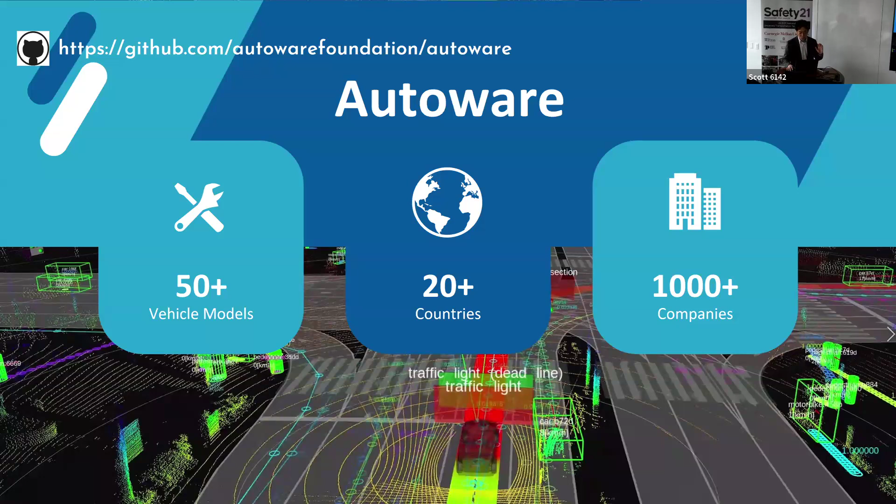Now let me explain what you can do with this open source software without any modification, any single line of code modification. This is some data that we recorded from our experiment in Tokyo. So AutoWare has a basic set of functions integrated, like localization, perception, planning, control. So it can successfully detect objects and localize the position of the vehicle and predict what will happen, then generate a trajectory, then control the vehicle like steering, accelerate and brake throttles to follow that trajectory. These are basic features.

Coming from years ago, so open source is not cutting edge. Open source is the way we provide basic features, well-known algorithms, which are not cutting edge, but are ready for deployment. So that's what I believe open source has value.

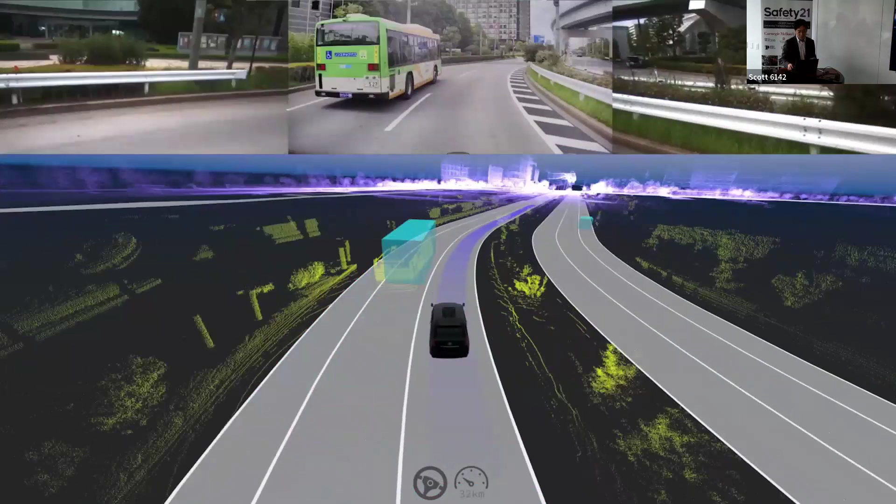Now, there are many applications that we can build using this open source software. I can introduce a few examples that we do.

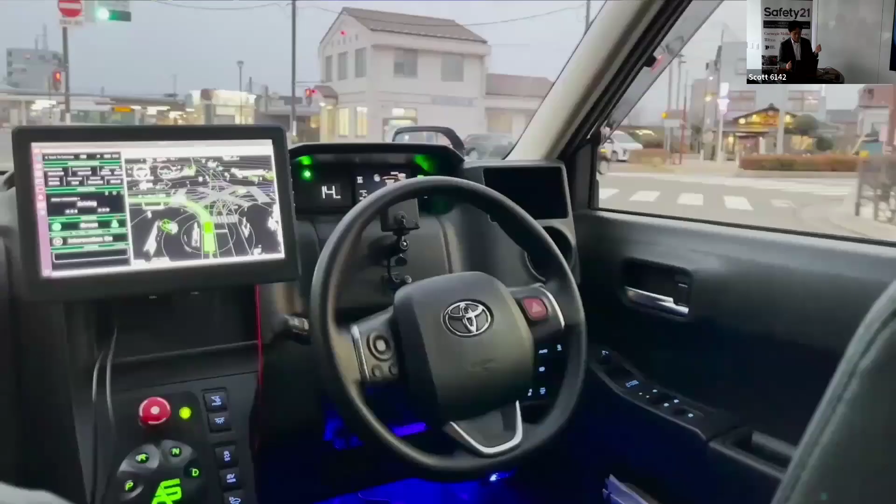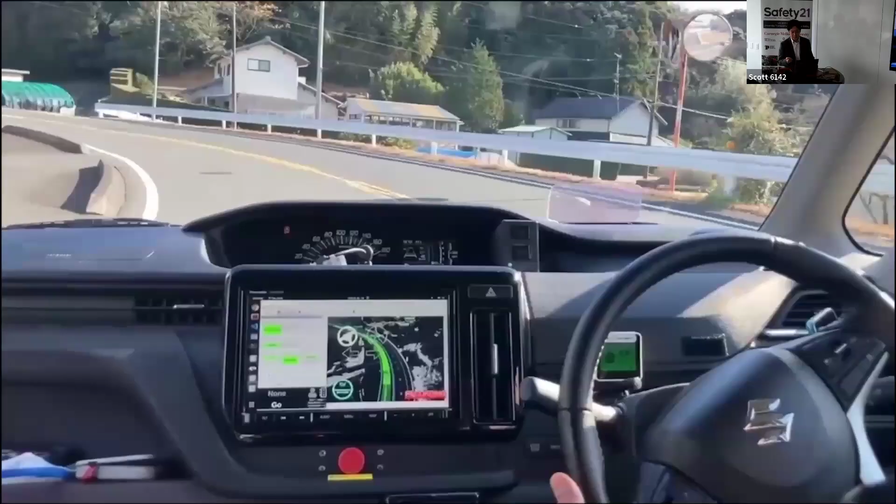So robotaxi may be the most well-recognized symbol of autonomous driving, and we deployed this even 4 years ago, with no human drivers inside the vehicle, and we qualified to operate this on the public road. But we didn't want to make a mass production of this vehicle because that's not the goal of our business. The goal of our business is to make car makers or other partners be able to do what we have done before. So open source is the way that allows you to replicate and modify what existing applications can do.

So this is Suzuki, and this is Toyota. We actually provided the Tokyo Olympics with a micro shuttle bus with some autonomous mobility.

Now, I also want to make this software vehicle agnostic, not only taxi, but also the buses. We also just started public transportation services in Japan, again with no human drivers in the driver's seat. We qualified through the Ministry of Transportation and police agency, and a lot of stakeholders now agree on the setup of the vehicle so that it can go for the real business.

So certification or certifying vehicles is kind of a challenge even today. I only see a few companies, even in the US, like Waymo, driving real driverless services. So it's not only about technology, but also about how we can communicate with the stakeholders.

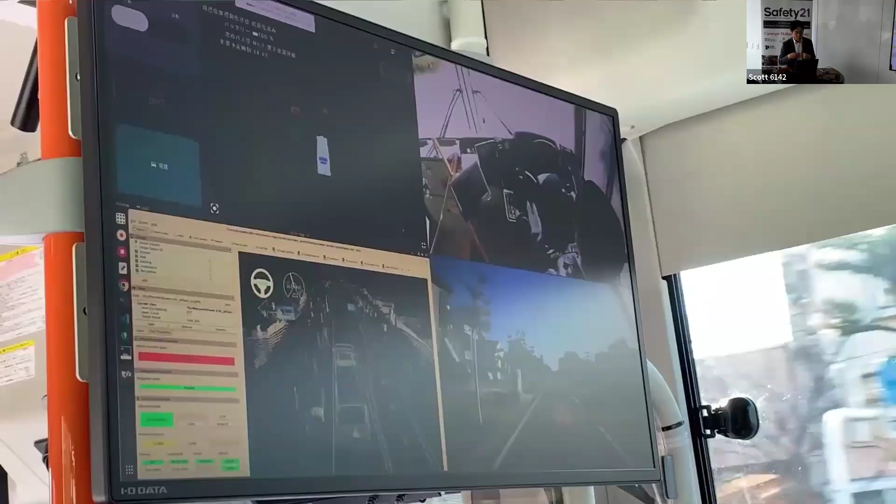For this operation, we are not yet qualified to operate driverless services, but it will happen within a year.

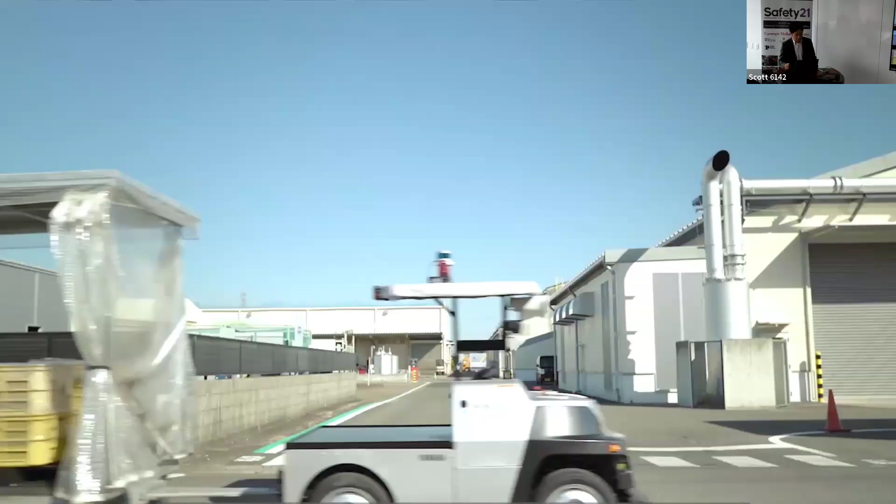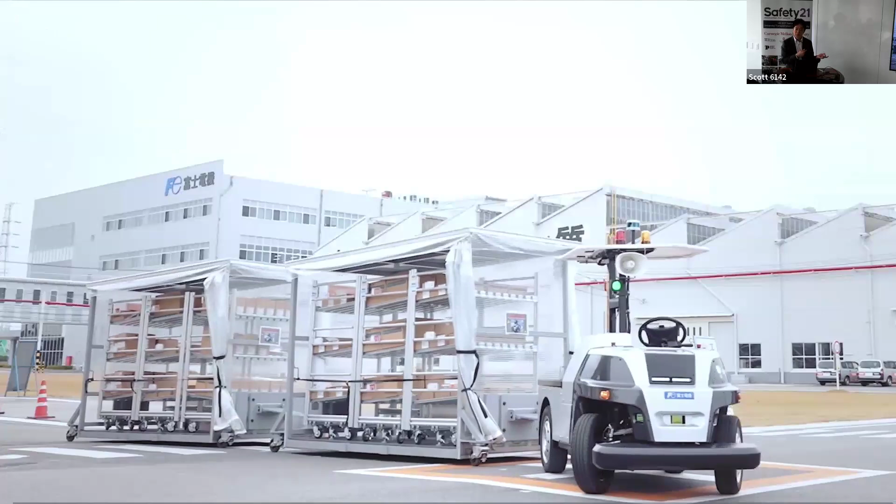And autonomous driving actually means a lot, not only for public road services, but also for geofence area factory automation. We have a joint venture with Yamaha Motors, also a shareholder of our company. This is commercial, 24 hours, 365 days operations already, and more than 100 factories are using our vehicles.

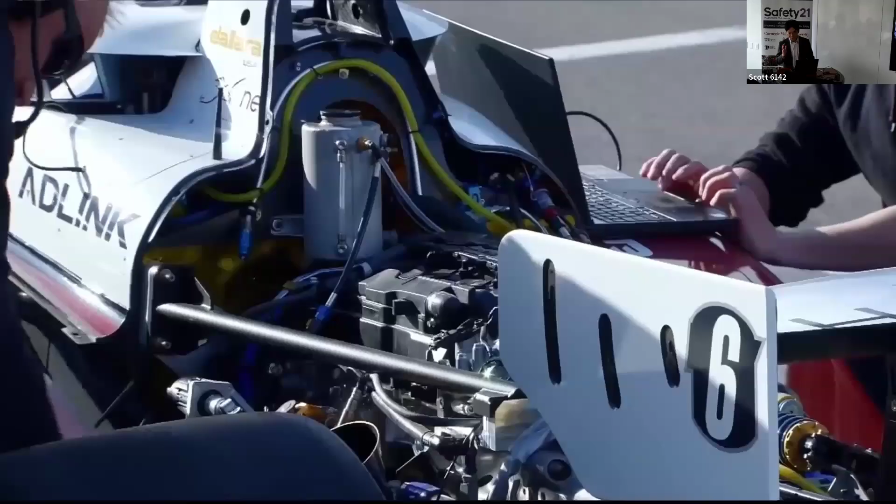So there are only limited case studies, use cases. Open source is infinite—everybody can basically implement their own application.

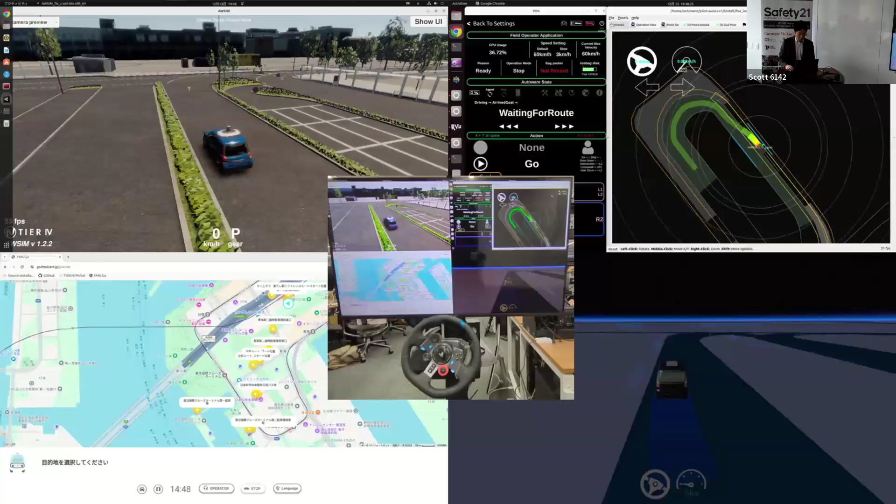So to support these users, we'd like to develop an environment which is easy to use. Field testing is sometimes difficult because you always put yourself at risk of accident. So I'm interested in providing the world simulator, which is an exact imitation of the real world.

Left top is a digital twin, an imitation of the real world. Left bottom is just a global map. Right top is the result of the software—if you know robotics, we use ROS, which has the viewer and some system.

So this system does not recognize that this is fake. The system believes that this is a real world because the texture and digital twin look really the same as what is happening in the real world.

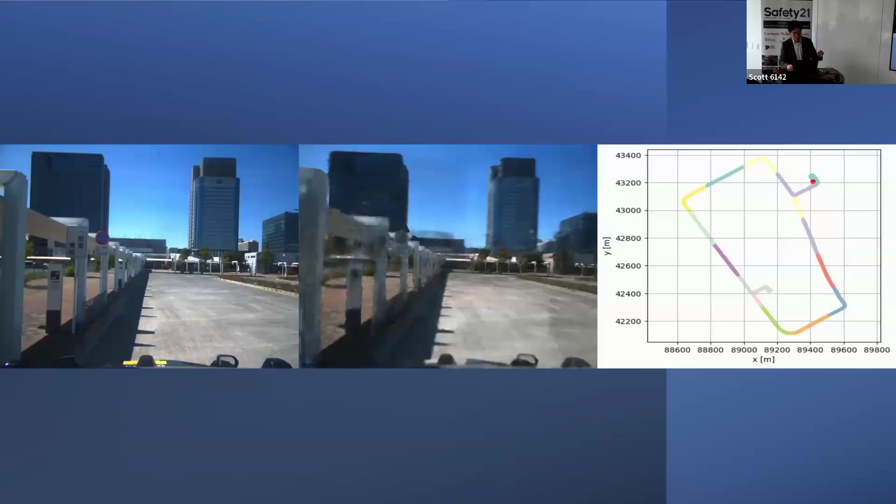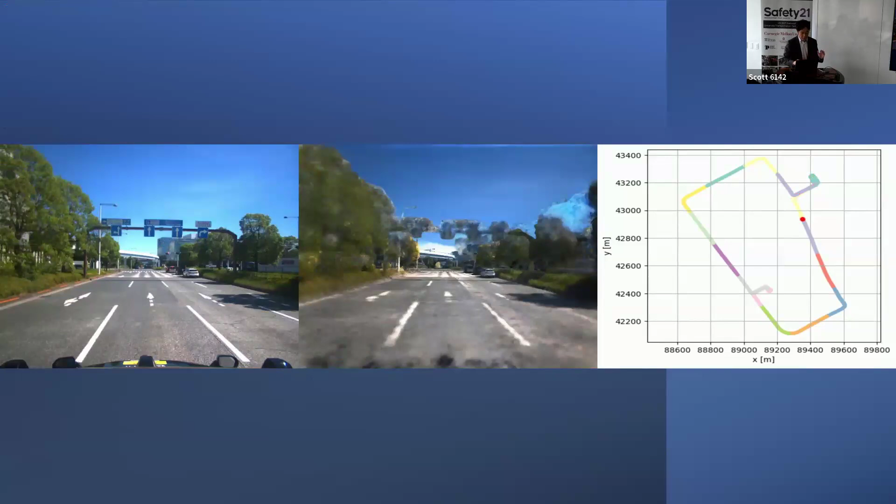Now we want to also improve this simulator using generative AI. Building a digital twin today is a little bit expensive, taking some complex processes. So instead, we'd like to just use the videos from vehicles and use generative AI to generate the real world that can actually predict what will happen.

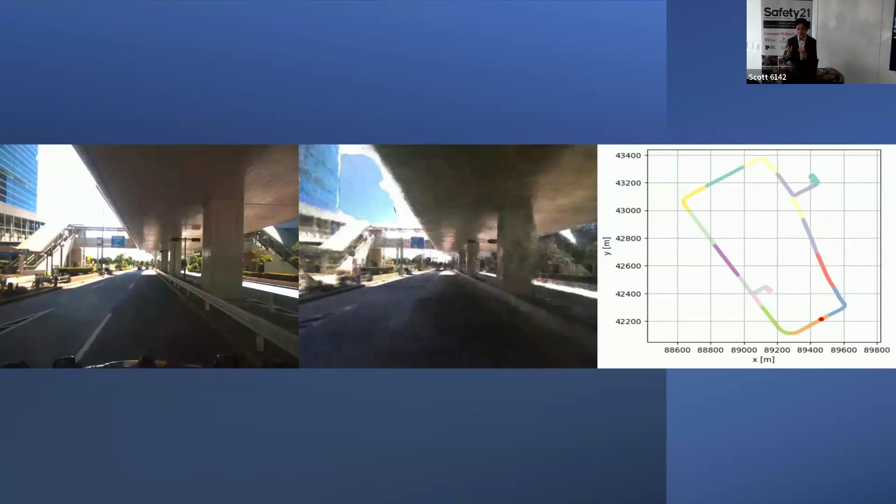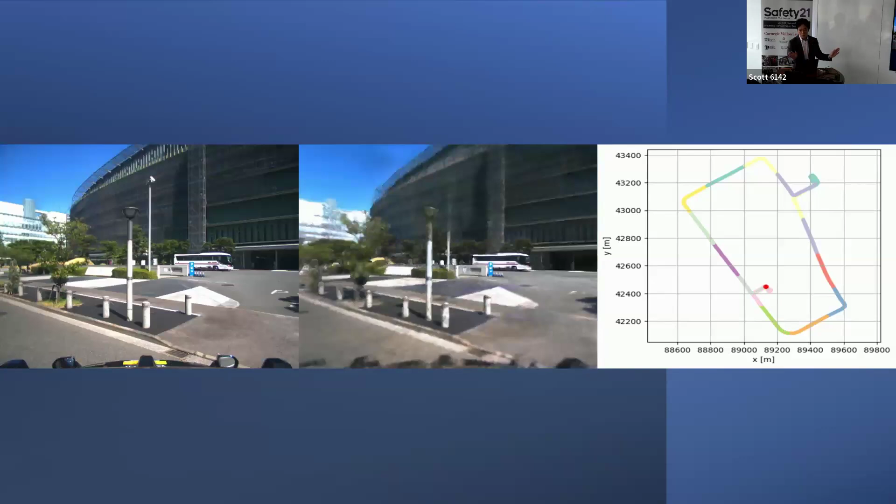So the left-hand side is the real data, and the right-hand side is the prediction from the generative AI. You can see that the prediction and the real data almost match, meaning that the generative AI can successfully predict what will happen. If we can do this, then we can leverage this system for simulation to test not in the real world, but also in...

Quick question, what is the time constant for the prediction? Is it a few seconds or?

That's a good question, because I didn't know, but yes, that's a challenge. Yes, this is offline computation—we need to really make it real time. That's why I think your institute has amazing work.

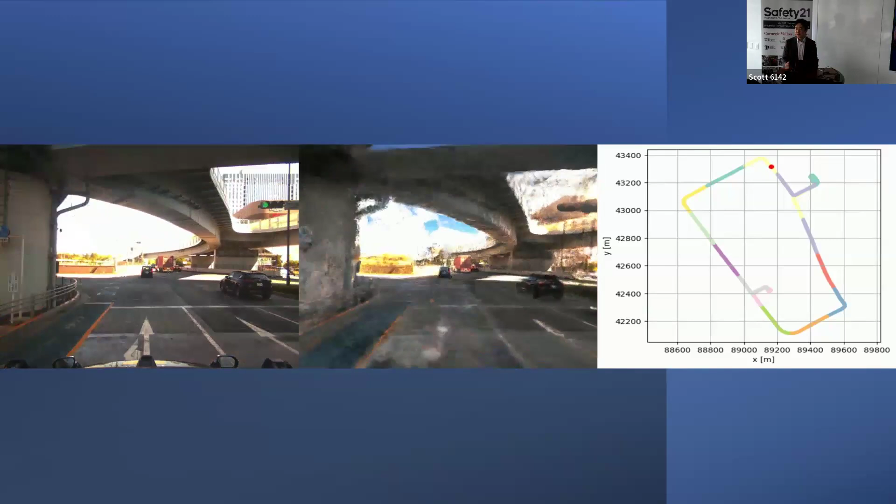So prediction means, can you predict this frame 3 seconds before or 10 seconds before? It depends on the configuration, but I don't think it can go over 1 or 2 minutes—1 minute is a lot, because we need a bunch of data, but it depends on the size of the network. Right now, like Sora from OpenAI, it's also 2 to 3 minutes, but I think going over 1 minute, some context doesn't make sense. So 1 minute, I think, is the upper bound right now if we have a big network, but it's a trade-off with the computation overhead.

So for this particular setup, I don't know what the size of the prediction is. Yes, we need more data. It's a chicken and egg problem. Once we have this world simulator, you can get the data from the simulator.

But in order to build this world simulator, you need the real data first. So we are collecting data from all over the world. The idea is simple: distribute the cameras, LiDARs, and our partners around countries, and they give us data. We really need to address each region's regulation because data is IP, and sometimes has regulations to go across countries. We can somehow address it in the future.

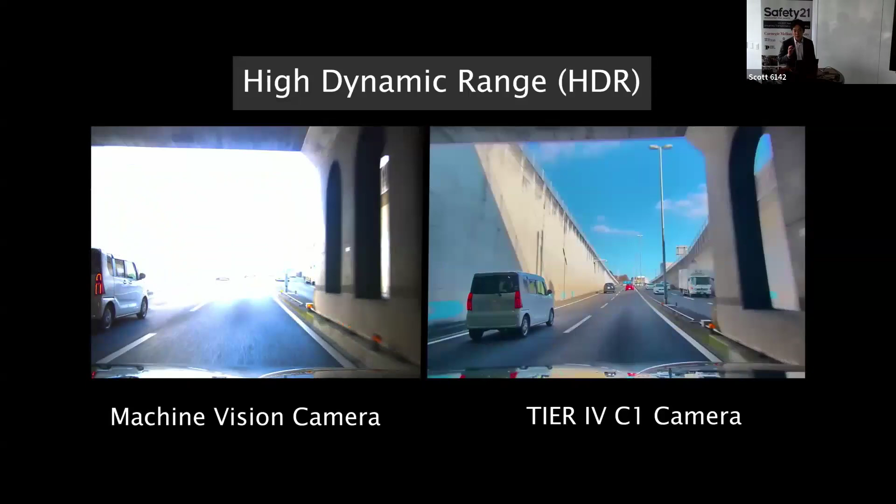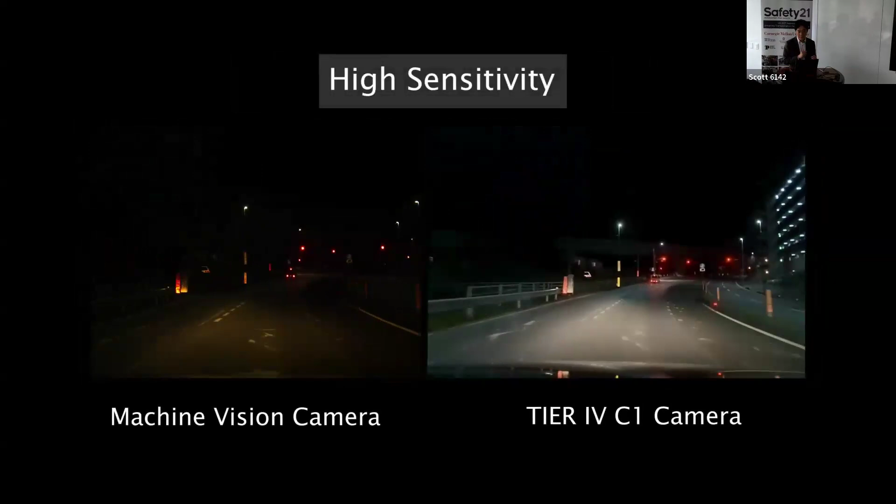Also, there are some details. In order to do this, we couldn't find any optimized cameras from the market, so we developed a new camera. Most cameras are not optimized for autonomous driving, so we developed a new one with our own design because we understand the software requirement. We can highly tune up the camera parameters module in order to work for AutoWare. So now most AutoWare users are using this camera because it is functional in many conditions.

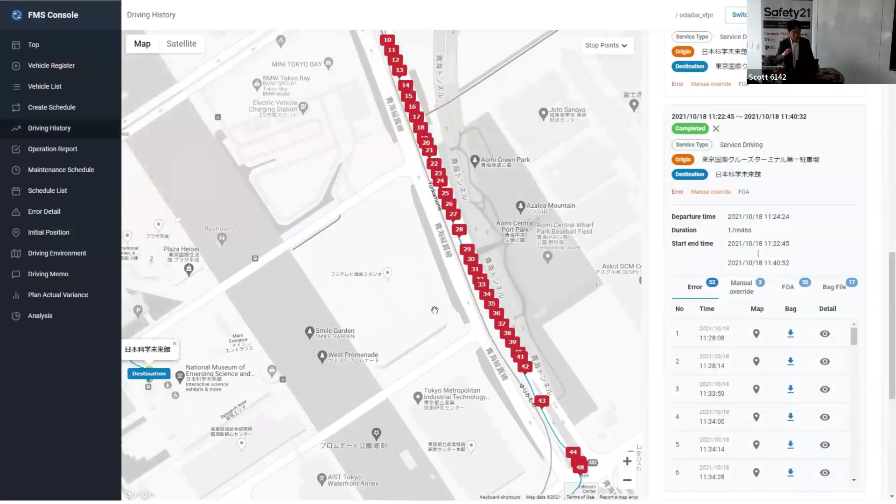And yes, we have fleet management applications because the whole experiment, we need to collect data. Sometimes the fleet management is not only generating routes, but also collecting errors or incidents or failures in the system, so that our developers always look into this analysis and reflect it onto development. So it's going to be development and operations tightly coupled. The DevOps framework is very important for us to make this engineering work.

And as I said, Japan has many projects going forward with level 4 deployment. So we really want to make a model case in Japan and expand it to international countries. So yes, DevOps is very important, like a run-to-run cycle. It's always chicken and egg.

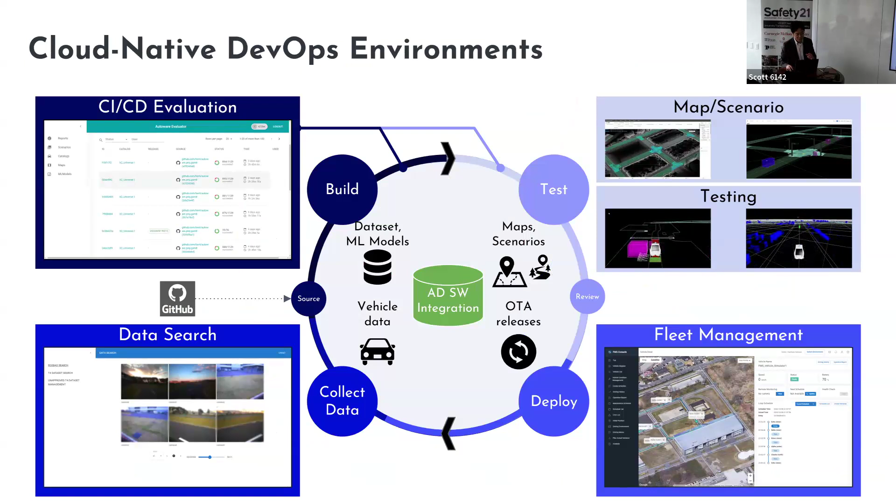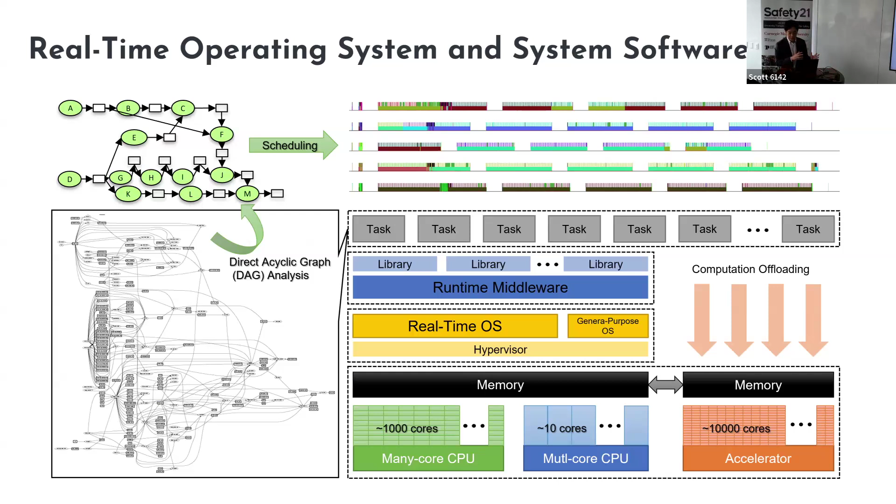So we provide this DevOps environment, and sometimes stakeholders often ask me, hey, did you give up research? No, I still do computer science research. My major is operating systems and computer science. So we're building real-time, low latency, high quality operating systems and system software using state-of-the-art approaches from academia. Also, we're building LSI, SoC, application specific.

This is my original PhD topic, building SoC. So we are optimizing software and creating logic, low power, for running AutoWare in real time.

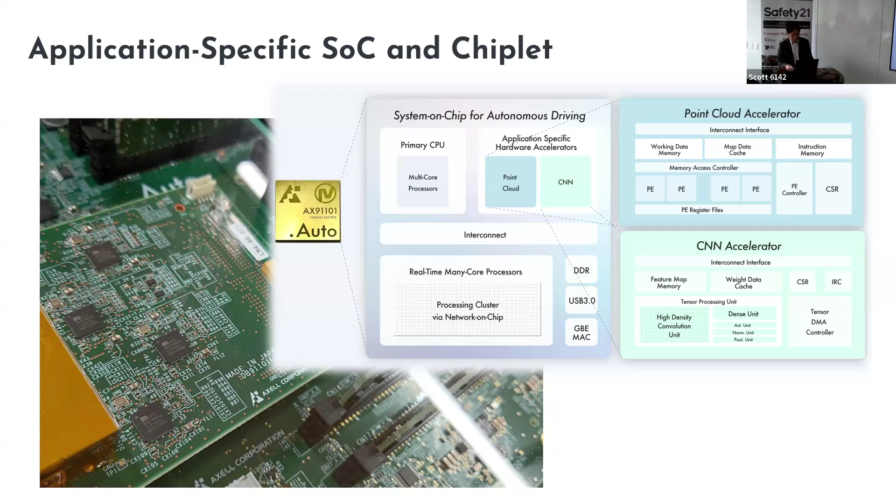Fleet management or cloud systems are also open in the sense that we have API interfaces so that third-party fleet management systems can be easily connected. So in Japan, we're working with a rideshare application, which is not provided from our end. We only provide base fleet management connected to autonomous vehicles. But from users' perspective, they don't want to use a new rideshare application, so we have interfaces to connect to the existing rideshare application.

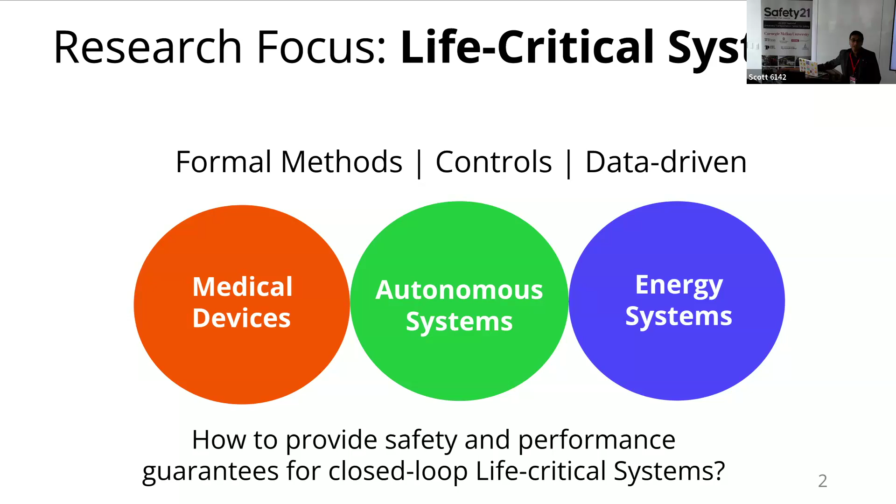Obviously today I'm going to talk about not so much my research per se, what we do, but really what we do together with Shinpei, with the AutoWare community. So this is a little bit more on the applied side, not so much on the theory aspects.

Generally, the theme is that we are broadly from the academic side. We look at the work we do with AutoWare as AI agents in the physical world. So it's much more abstracted out, but it's also very applied.

As mentioned before, I wear a couple of different hats, but two of them are related to AutoWare, where I just stepped down from the board last week, and then I also direct the AutoWare Center of Excellence. We call it centers of excellence because there are over 32 universities that are part of this. They all have AutoWare-enabled vehicles, they all do research on AutoWare, and that's a really great community.

We also have these small-scale vehicles and classes that are taught at CMU now, with the F1TENTH and Robo Racer. As Shinpei mentioned, AutoWare so far has tasted success with robo-taxis and buses in Michigan, fast cars, and a lot of logistics-based vehicles in these kind of closed systems.

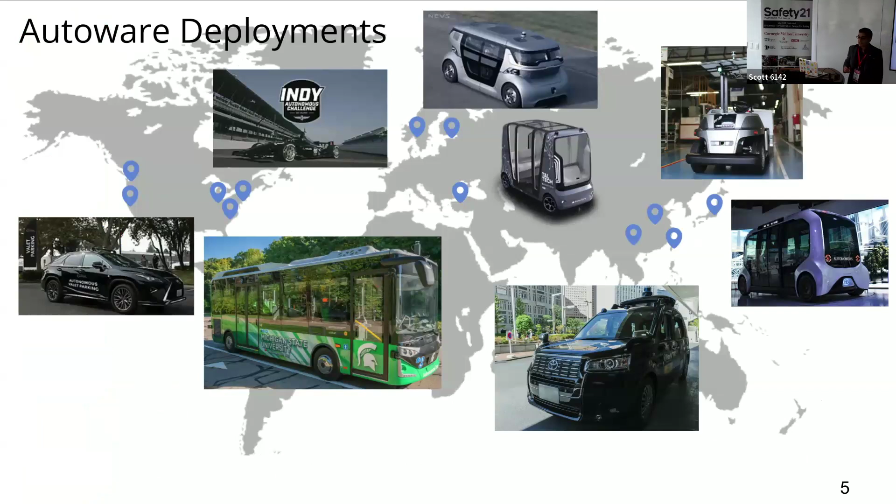And this is all made possible with these 80+ partners—academic institutions, but mostly industry partners that contribute directly to Autoware. So I'll talk about some of the themes where we are going over just the next year.

This is not necessarily a giant roadmap, but the first theme is really software-defined mobility. As we move to these skateboard EV chassis, this basically makes software a first-class citizen because the rest of the platform is becoming more and more commoditized compared to vehicles today. This is also in collaboration with several CMU faculty, looking at software-defined manufacturing, software-defined design of the vehicles, sensing with Swarun, and testing.

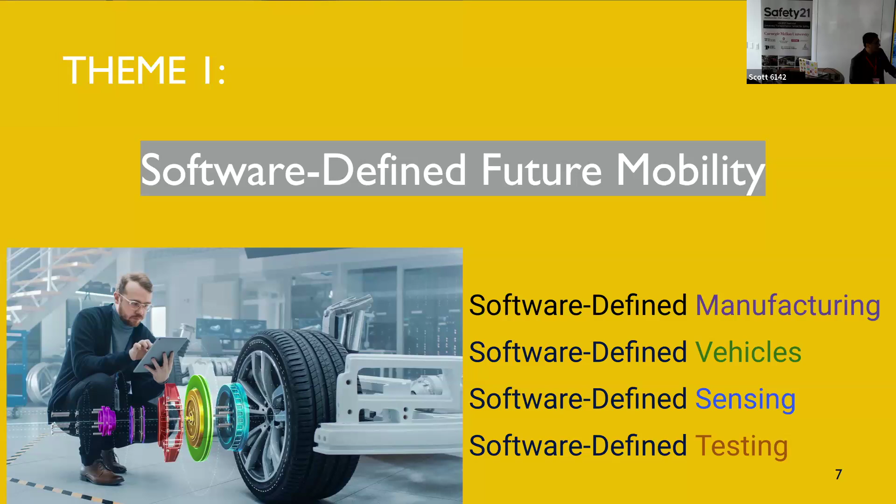The big change here is that now you can do this on demand—designing the vehicle, configuring it, customizing it—because it's become so modular and much easier to integrate than, say, building a Toyota Camry, where you have to make at least 8 to 10 million units to really break even. Versus in this case, now you have these very configurable chassis.

Going from an ICE internal combustion engine with over 2,000-plus components, this reduces down to less than 20 modules. There's no even a need for an axle, because each of the corners has its own suspension, powertrain, and control system. They just expose this sort of API after this point. These manufacturers are also kind of generic van manufacturers, these white-label manufacturers. This is really going to hit a lot of the incumbent US automakers pretty hard as we go here.

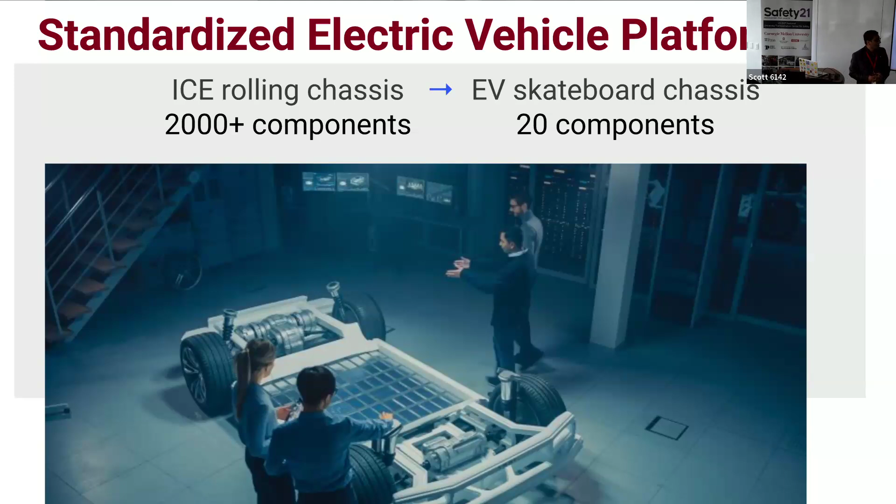But we are not competing with on-road systems here. We're really looking at—well, instead of making 8 million vehicles, they can now make say 35 to 250K vehicles for ag, or for mining, or for some last-mile use cases, or for logistics. So this is an approach where we can do that.

The other big change is that the number of electronic control units is going down also an order of magnitude, from almost 100 to just about 3 main computers that then operate on these. So architecturally, these are getting more simplified in number of units, but more complex with the cross-platform interactions over there.

Our goal is to work with these electric vehicle platforms, to have open autonomous vehicle software with Autoware on open standard electric vehicles, where standard means commodification and configuration. But for a lot of these off-street use cases—mining, logistics—we're working with different partners in industry and academics at that intersection, where you can have your skateboard platform and configure it for a minibus, a sedan, a mini truck, and so on in a small scale manufacturing facility, about 10 to 20,000 square feet, rolling out on the order of 60 to 80 units a day.

So it's really making this more of a micro manufacturing view, where these systems are 80% modular, 15% configured, and 5% customized. That allows it to operate in this new mode of manufacturing.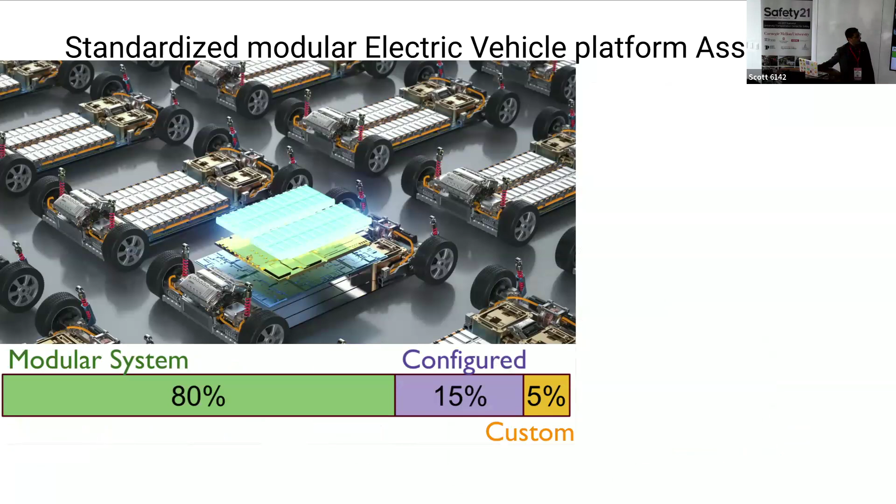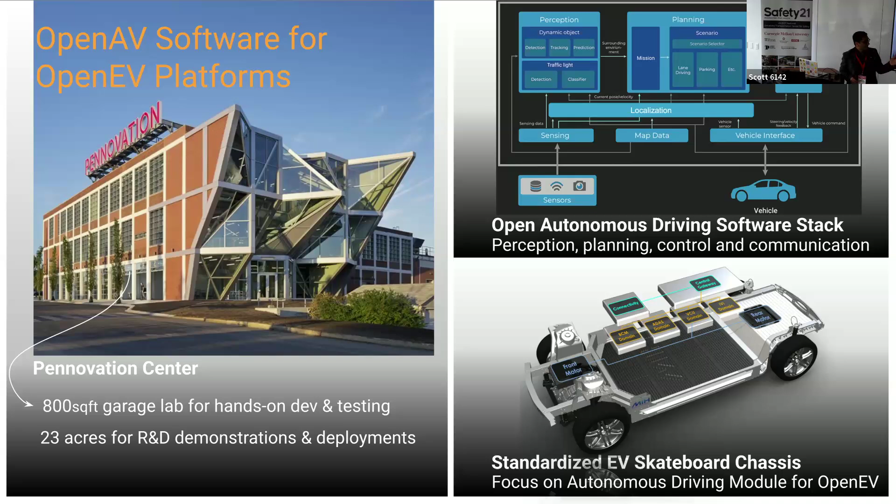To do that, we started small—we have our lab. Just like you have Mill 19, about 12 years ago Penn got this 23-acre facility just next to our campus, which was quite remarkable in Philadelphia. We have these garage labs, and that's where our AutoWare lab is. We build electric vehicles and autonomous vehicles in and out. This has none of my PhD students—they're all master's students. The PhD students do the theory stuff, and these guys build. They're so self-organized, motivated and driven, much more hands-on. I'll show you some of the projects.

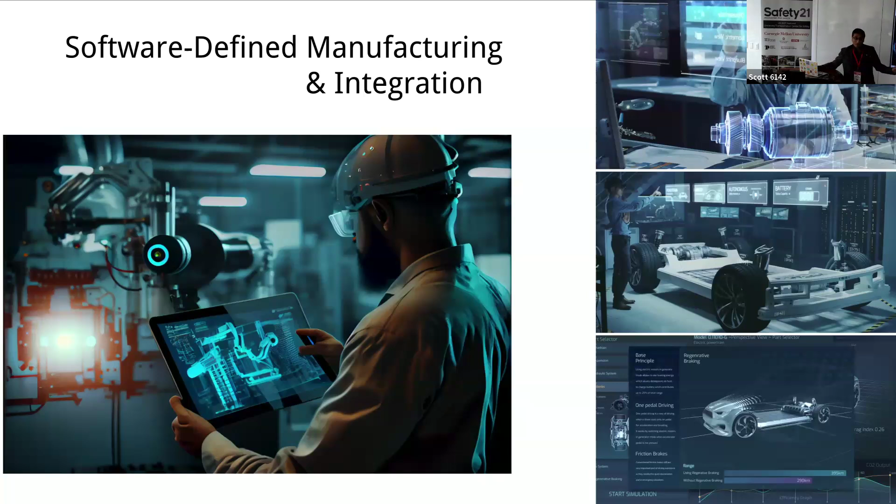The first theme we'll get into is software-defined manufacturing and integration—how we go from generative design or AI code designers for design auto-completion, so you don't have to start from scratch. You have seed designs, mine them in a knowledge graph, and use that to generate new designs for new requirements through architectural exploration, parametric optimization, and generating these new designs. Kind of like Jarvis with Iron Man. That's the approach for systemic generative design we use to cooperate with the whole CAD pipeline.

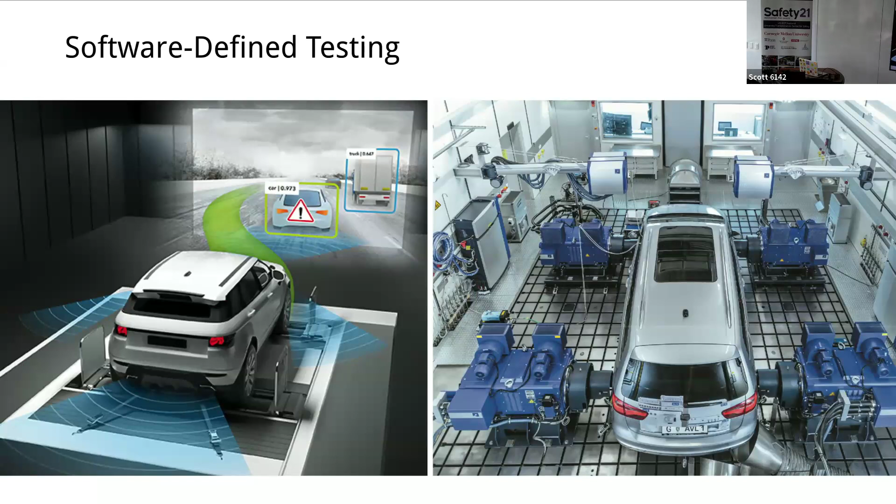The testing is also part of this. We have virtual testing—you put the vehicle on a dyno and test it out. This is with our partners at Clemson University for virtual testing. As you're rolling it out, even in about a 20,000 square foot facility, the last station, kind of like a car wash where they're drying you at the end, tests the system in this virtual environment. It has a lot of testing capability to go through subsystem by subsystem and interact with the vehicle, without it even getting on the road.

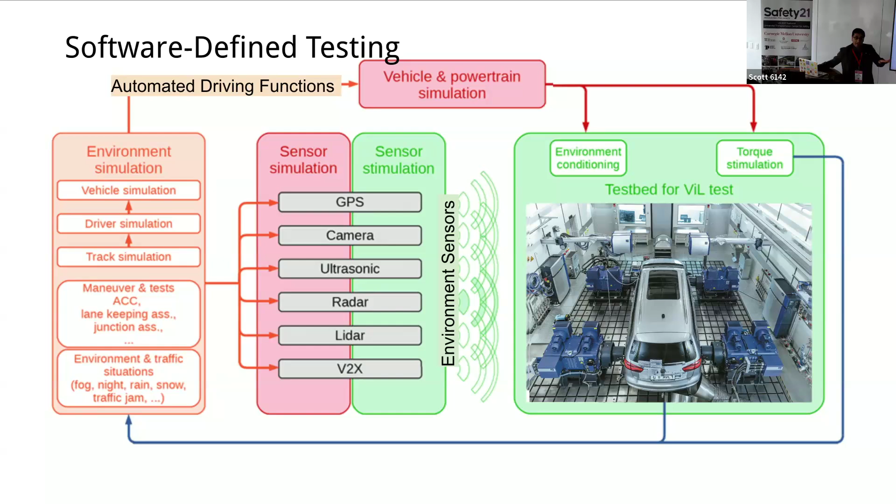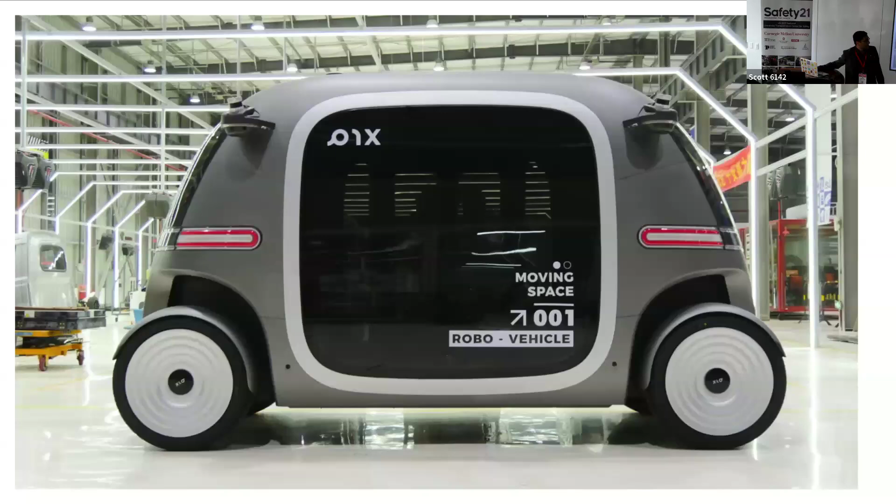A lot of the partners who work with AutoWare develop these kinds of chassis—this is just one, there are several. They're configurable, and this one is just for research, for universities. Many university partners have this chassis; they bring it to our conferences like ICRA, IROS, wherever we go. And now this is in production—there are many design concepts, but this is real, it's not an AI image.

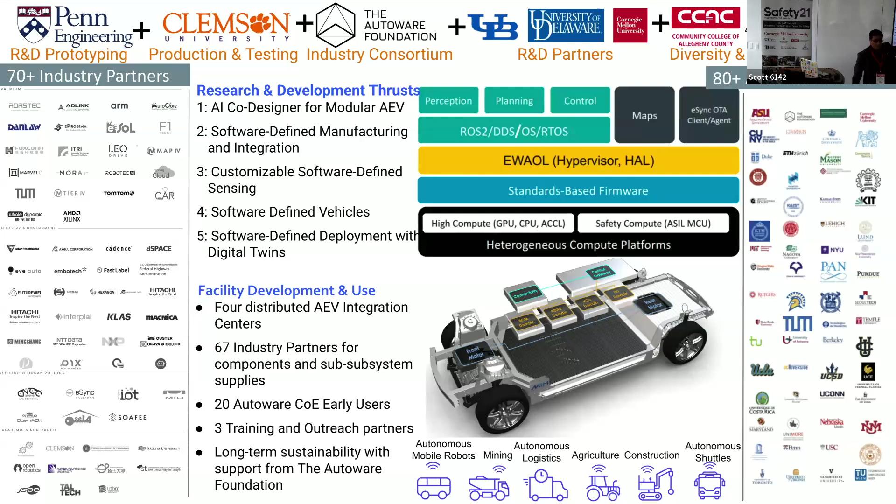With that, we're working to build this stack of software-defined future mobility. These are the actual platforms I showed you, and other smaller scale vehicles. The nice part of that facility, like our version of Mill 19, is that all the partners keep coming and going, working together with students and many different professors from Japan, Michigan, Delaware, and so on.

A way to bring in this cooperation was to bring academics in as first-class citizens as part of AutoWare—as users and contributors—by setting up the AutoWare Center of Excellence about 2 years ago. Now we have over 80 different universities, all with vehicles and expertise. For example, Zdeněk from Czech Technical University spent about 8 years setting up model-based design at Porsche in Prague, a 350-person department at Porsche just on software. Each partner has this expertise and they're all very involved—we have AutoWare specific projects with them, from computer vision to full stack to connected vehicles.

I won't put these guys as some fluffy systems guys. I think that used to be the trend in the 90s, but they are going quite deep into actually constructing not just applications, but building their system. So integration of LLMs and VLMs with AutoWare is another emerging theme with Purdue.

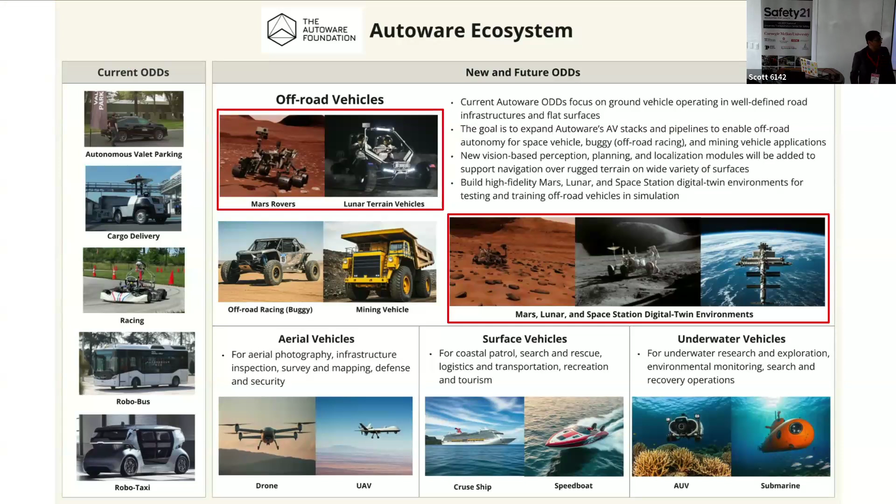So the next theme is really, okay, where else do we go beyond? One of the directions we're working on is going off-road and into space. We have these current driving scenarios, and now there's a lot of interest, even from the Japanese Space Agency, to have these vehicles that you can design much faster and in a much more competent manner for missions, because there will be many more missions happening.

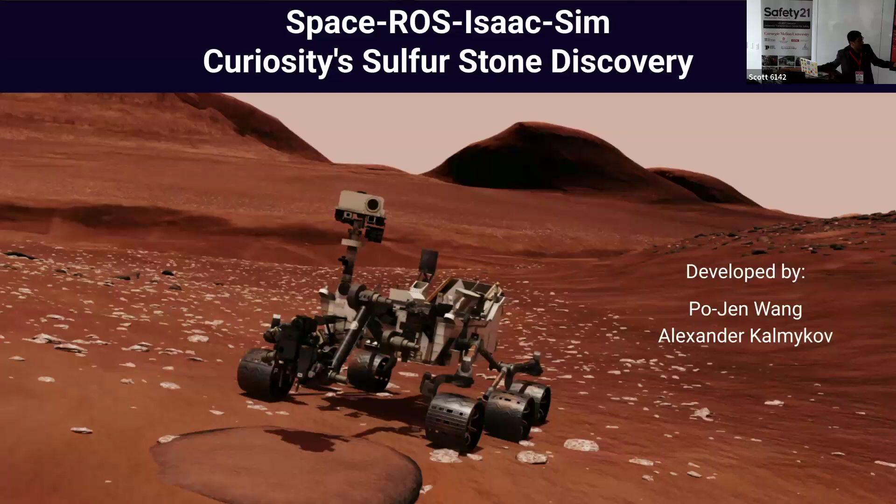So one of the thrusts we've started is to design vehicles with full dynamics, the terrains, and to have these. To kickstart that, our team participated in NASA competitions. They got 3rd place in the first one they went for, on the Mars challenge, and then 2nd place in the next one, for the Moon challenge.

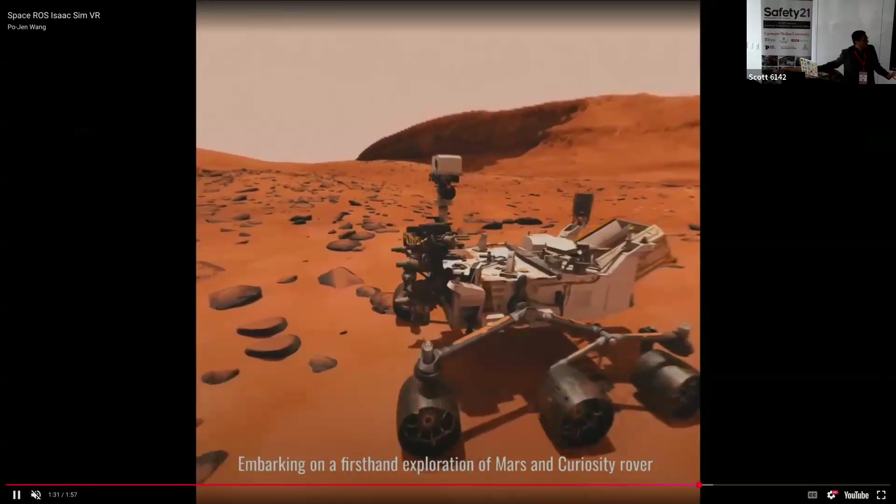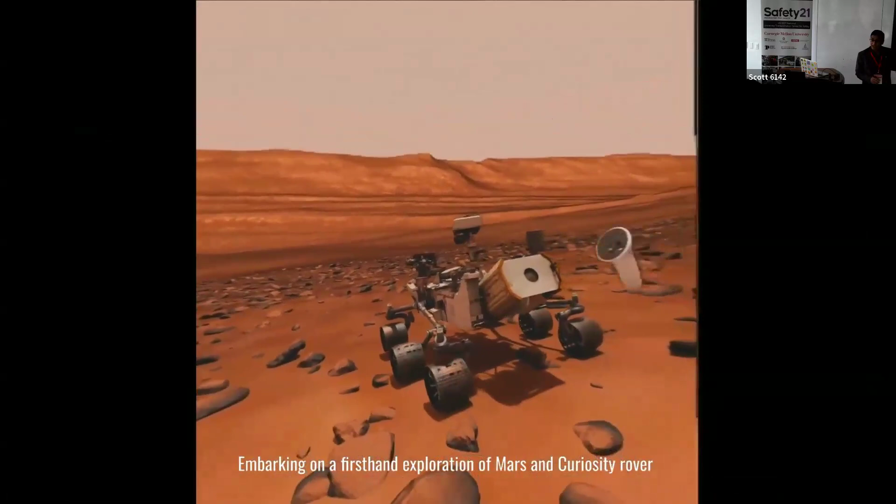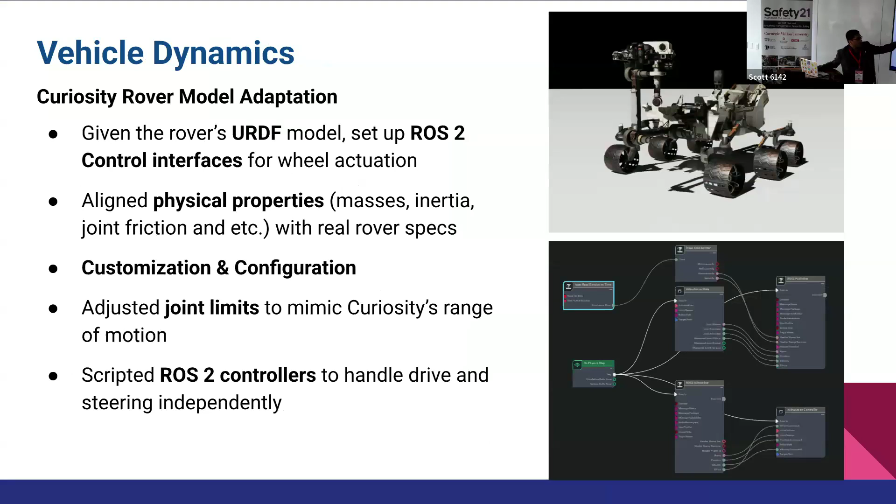To do that, you have to build a lot of these building blocks, and that's where we wanted to start, building that system so that when we have Autoware running on these vehicles, they still have a similar stack, but very optimized for computation constraints and for the environments, with learning-based perception, planning, and control, doing a lot of adaptation online, because you're not going to be able to fully capture those environments. That went through a lot of the design for those parts, and now it's really building these kinds of vehicles and going in that direction.

The other theme is really looking at building reference platforms. What can researchers use that actually runs Autoware? So we have our small scale vehicles, our mid-scale vehicles, and these are all student built, but everything is open source. The same design gets replicated in Hungary, Poland, Korea, South Carolina. That's the way we can share these, and they're all running Autoware. This also means you can start cheap and small, then grow with better, higher fidelity dynamics, better sensors, and so on, as you scale up to real world systems, so that's kind of an on-ramp as we go through.

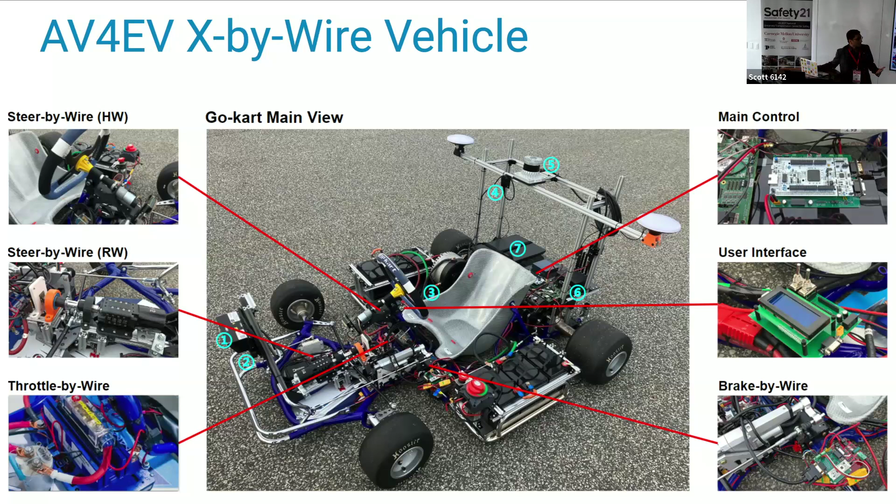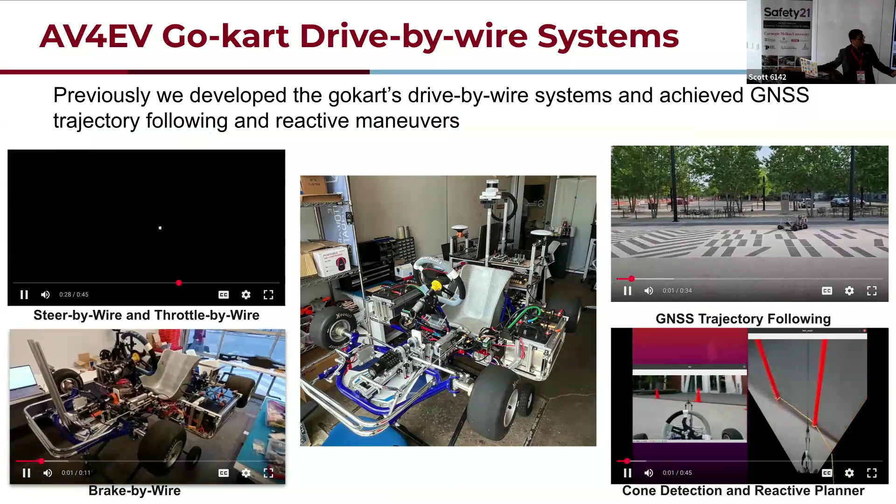This is just one project we did, to have the students in the master's lab do the full stack, from mechanical, electrical, power systems, embedded control, full autonomy stack, all in 4.5 months to build the system. The only thing we got off the shelf was this blue frame, and of course a seat, but everything else was machined. That was a 6-person team to begin with, very dynamic, with probably 200 different problems to fix. They built this full drive-by-wire system with a digital twin, and this is testing in our garage facility.

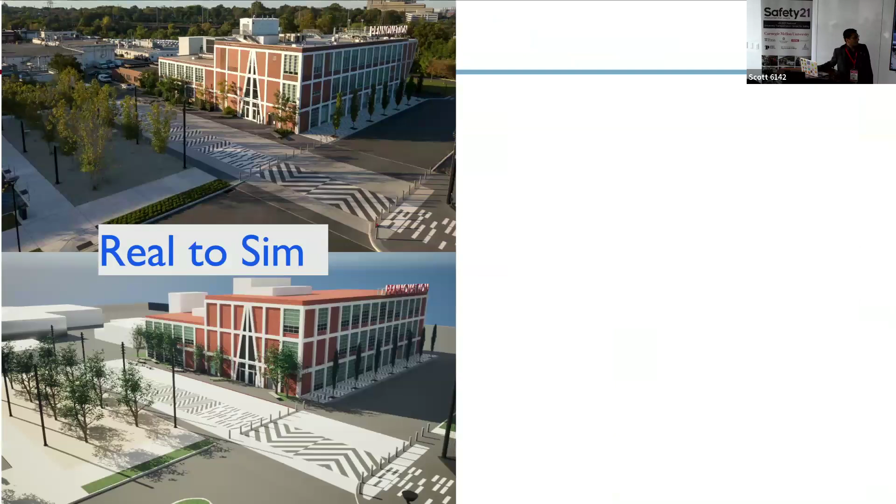This was when we were just starting up these platforms. Everything is fully documented, open sourced, and that's how we share the designs. To do that, we also have digital twins. This is our real campus, and this is a twin campus, for testing out the vehicles. It's very easy to use, but they have very high fidelity interactions with the environment, and it's running the whole stack.

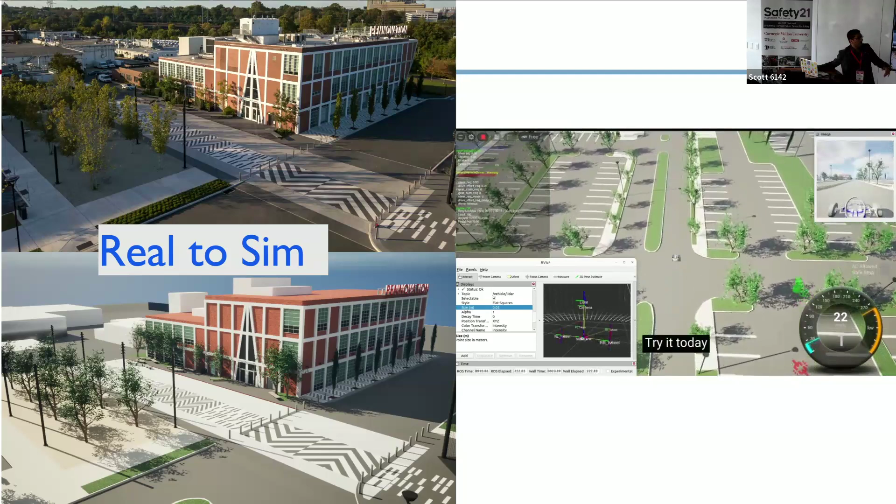That's the main thing, it has to be useful, not just pretty. This was generations of the teams, and then they go on to have really good jobs afterwards, and they're all very successful moving on from this. They won the 2023 competition, that's one team. Then there was a competition with UC San Diego, Purdue, Berkeley, and our team won again in '24. We won't race in '25 because we're able to do that now.

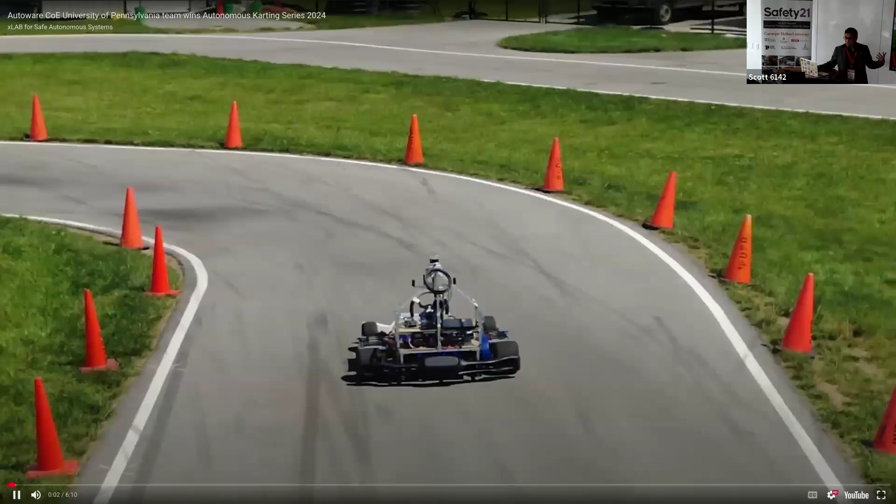So that's just showing how to build an AutoWare-enabled platform and get it to race and drive in this 4.5 to 5 months time frame, a zero to hero kind of thing. And that gives a lot of confidence to the team also as it goes through.

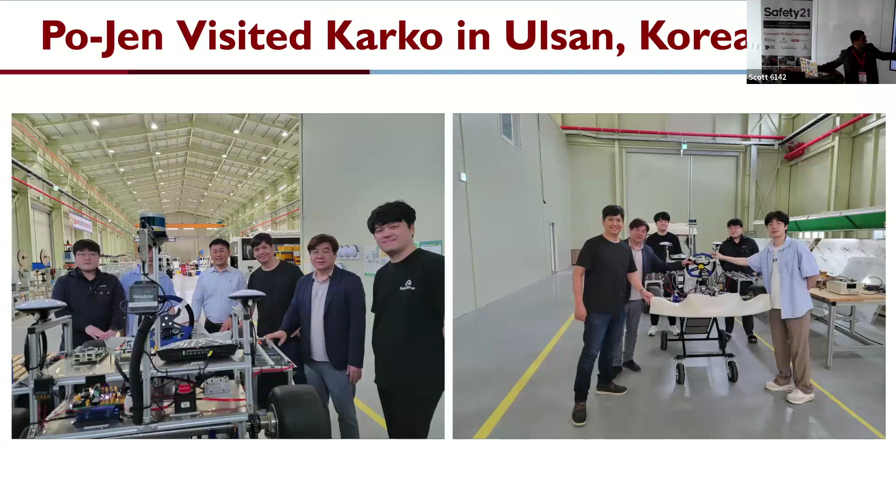The same thing is replicated in factories in Korea now, and going on. We had CMU faculty come and visit us and see our labs at Penn. And it's also sort of like a lot of the use of AutoWare in our 23-acre facility is really to have navigation basically within 1 hour.

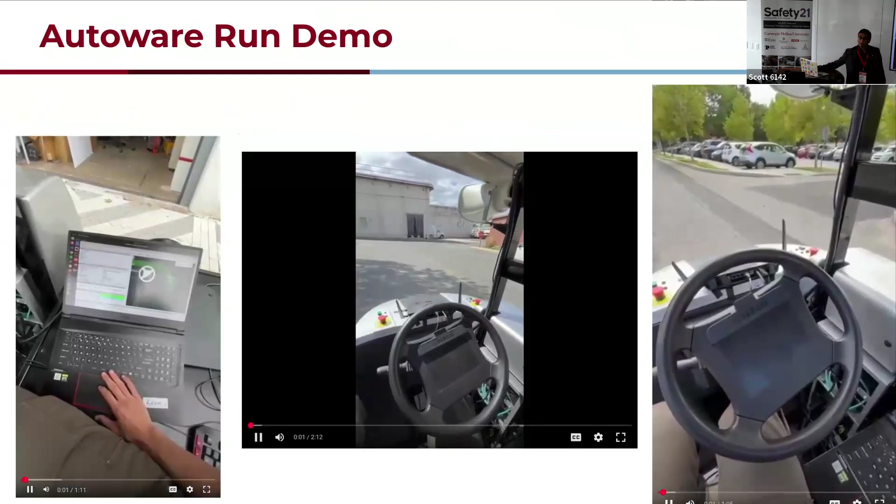That's what we want to do. Autonomy at a basic level with behavioral planning, with the maps, everything, all to operate out of the box. And then we also have built these off-road racing vehicles that are now working with multi-terrain interactions. And that's so that with education outreach, our goal is to show the full stack.

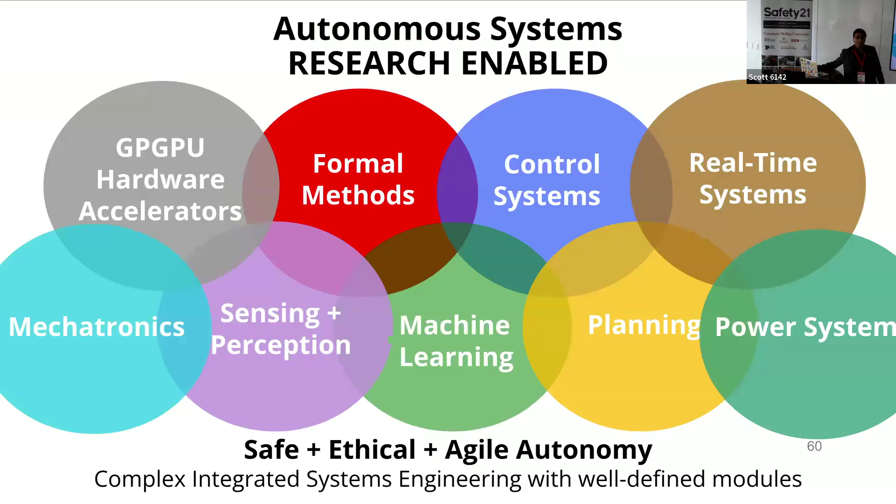We built these cars. This is just the first generation. It used to be called F1TENTH. Now it's called Robo Racer because it goes to multiple scales. At that time it was 1/10 the size, but 10 times the fun.

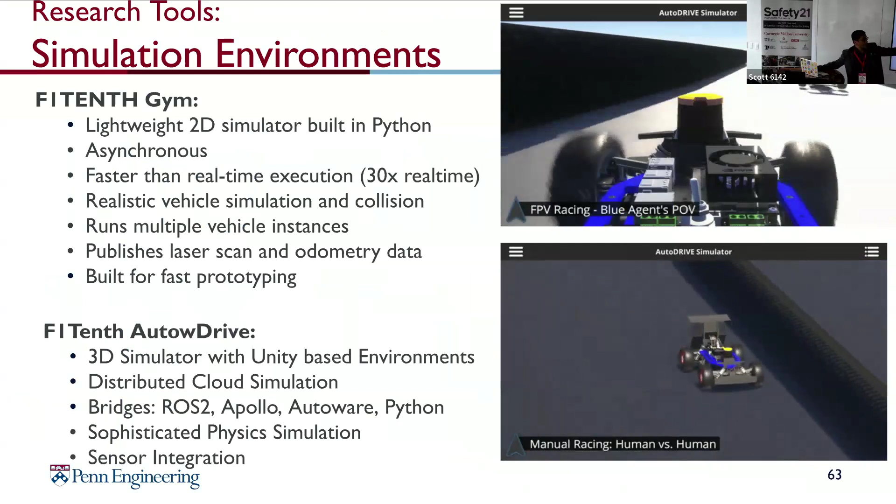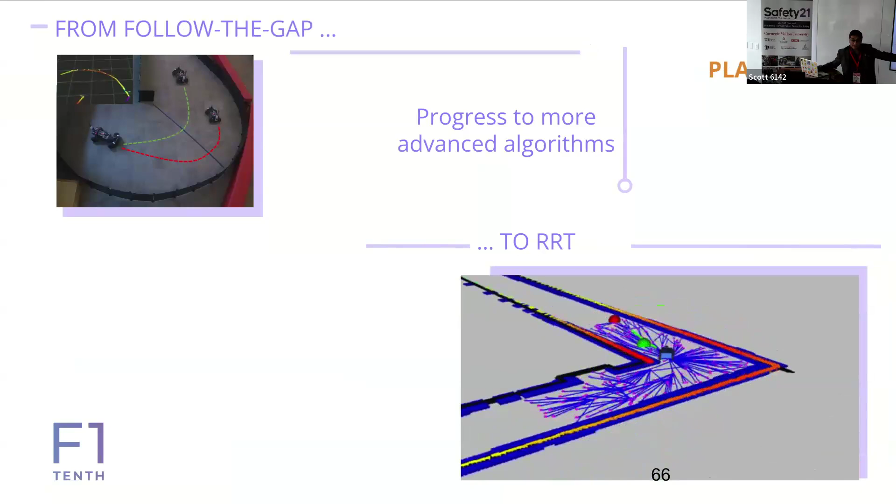And now it has very good simulation environments to build your stack, test it out, and then deploy it. The good thing is that we help the community with building, coding, racing. It runs SLAM on board, running RRT, all modern planners on board. And then it's running model predictive control, MPPI, everything on board. It's all part of the standard stack.

And we have this course. It has been taught in at least 36 universities now. And there are no exams in the course, just races - race 1, race 2, race 3. It's very, very fun, very challenging. Our whole goal is to go from concept to code to competition and get the student through that pipeline and have a great time, but it's very challenging also.

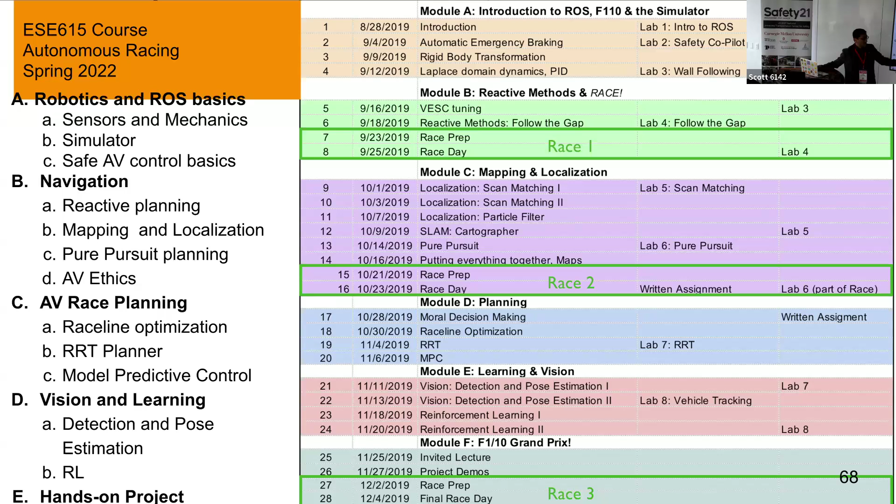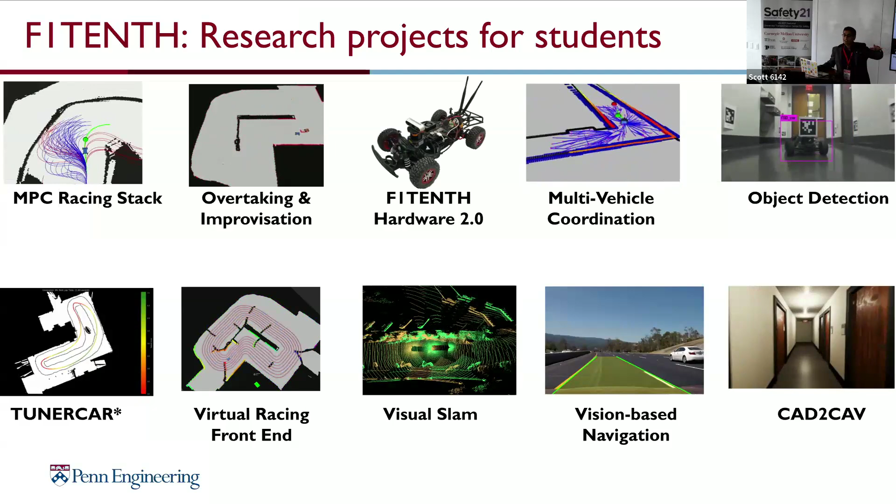And they do many different projects on perception, planning, control. We just kicked off our projects. I was in West Virginia University yesterday - they have a whole class. John Dolan has a class here. Dozens of US universities, TU Munich, and so on.

And so let me see if the audio works here.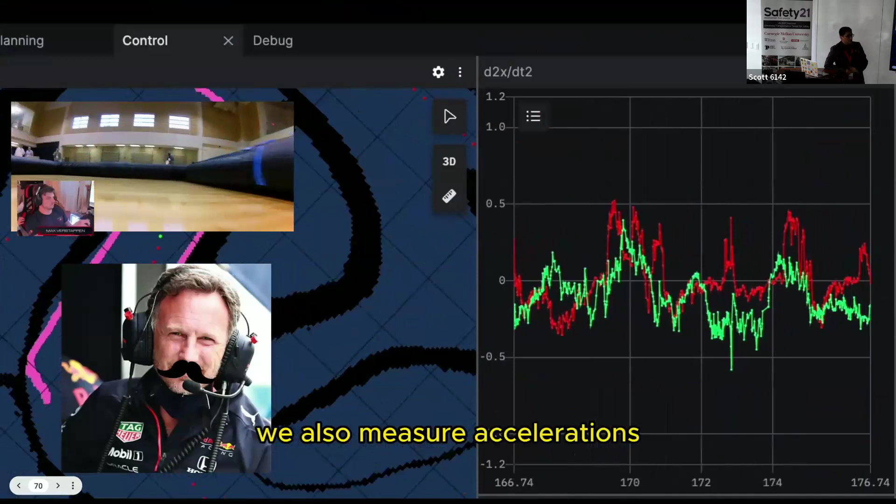The LiDAR point of view helps us understand how well the car is tracking the optimal race line. The speed graph helps us understand throttle control and brake timing during a lap. We also measure accelerations to estimate the car's available grip budget. To debug our obstacle avoidance system, we plot the laser range in front of the car.

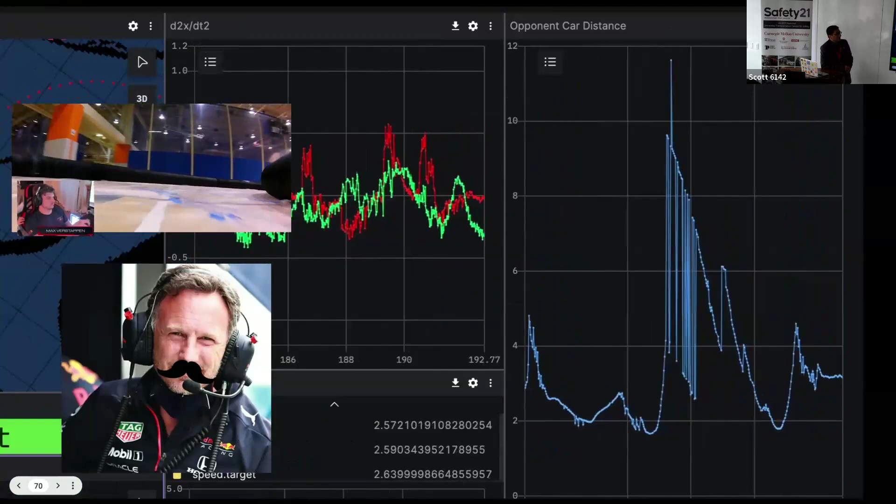And then with that, we had many generations of students who passed through. This was actually one of the first students. He was the head of motion planning at Tesla for about 6 years. Then last fall, he left to start a bot company with Kyle Vogt from Cruise. Their first round was, I think, 150 million. But the point is that they can realize their dreams, and they are really good enough.

And many became professors. This is just from the early days - it obviously goes down till 25. And there are over 90 universities that use F1TENTH RoboRacer now worldwide, and they compete.

And we also have many workshops with this, and they're very well attended. And then we have theory workshops - there's no systems people, just math over here on multi-agent dynamic games, and looking at it like from economic theory to really mean field games, working with full dynamics and continuous motion.

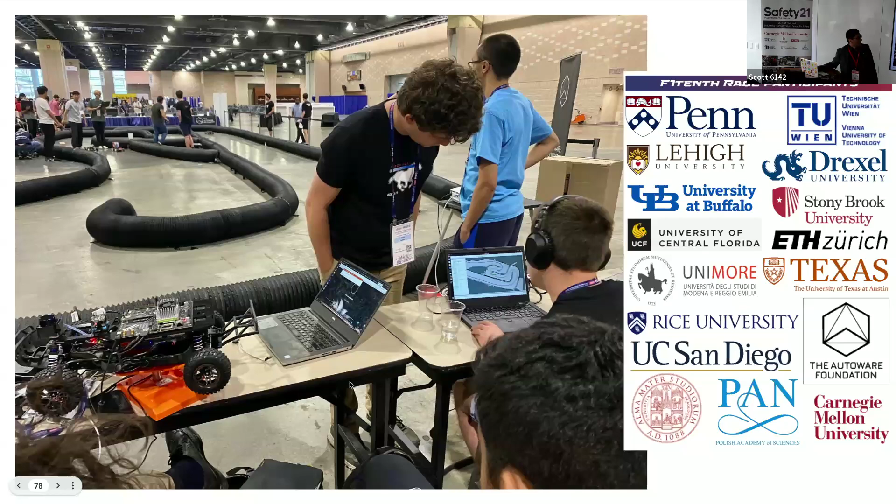And then we have a lot of competitions. This is in ICRA, just after COVID. They all have the same platform, but it's a battle of algorithms. Last year we had 9 competitions worldwide in all these different places. And we'll have one in ICRA again in May. We'll have a joint competition with CMU, Lehigh, and some regional folks also just for fun here.

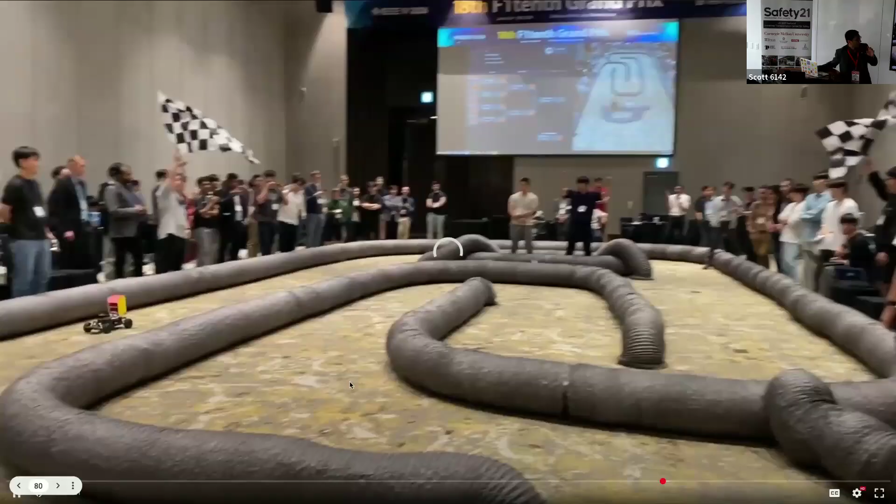They all build a map, find the racing line, then have to come up with overtaking strategies and work with that. These are very exciting teams. This was in Korea just last - they're always part of some transportation, robotics, or controls conferences.

So I'll spend maybe 3 more minutes on what research we do to power a lot of the upcoming stacks for autonomy. So normally in civilian driving, if a car is trying to merge and isn't able to get in - but for us, we can nudge through and get across. But for autonomous vehicles, they really struggle with non-cooperation.

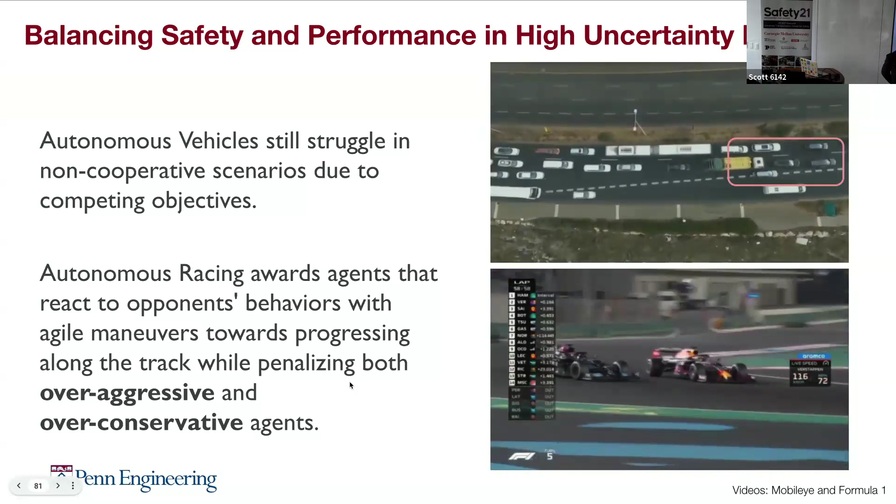And in the civilian case, there are so many different evaluations you have to do, forget about certification - just even testing is so large. Verification is not even part of a real discussion. But here you're just optimizing safety - maximize safety.

If I reach home 2-3 minutes late, no big deal. It could be the traffic, it could be something else. But that didn't give us a good problem. It was too open-ended, vague.

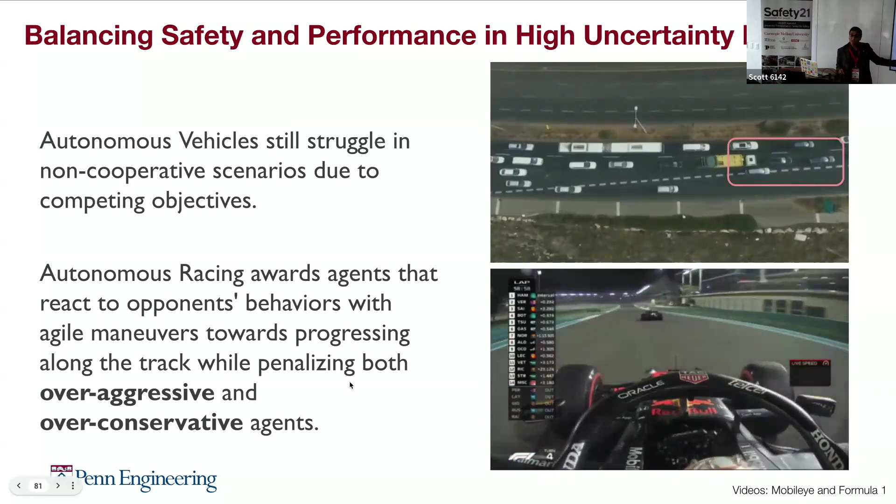So we said, let's focus on racing, where we have this tension between safety and performance. With racing, you get penalized for being overly aggressive, you crash, you're out of the race, or you get penalized if you're too conservative. In fact, if you're only half a second too slow in your lap time, you're out of the top 10, and that's end of career.

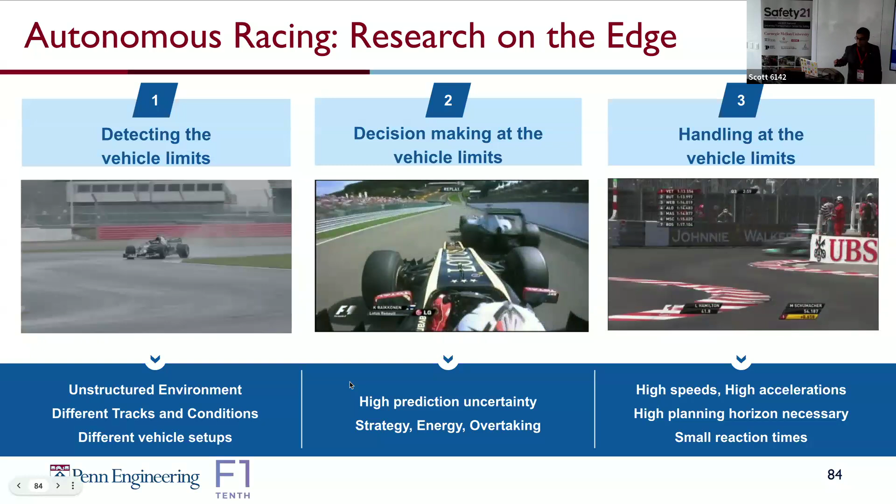But it's not all about speed, right? Only 40% of the racers who won actually had the fastest lap time. 60% of them were just really good at balancing aggressiveness and restraint. That's what we're trying to achieve here. But you're operating with full physics, full dynamics, high speeds, high accelerations, fast reaction time. You have to be operating at the nonlinear limit of your tires, of your engine. If you aren't, you're going to get outcompeted. So you have to understand how to capture those.

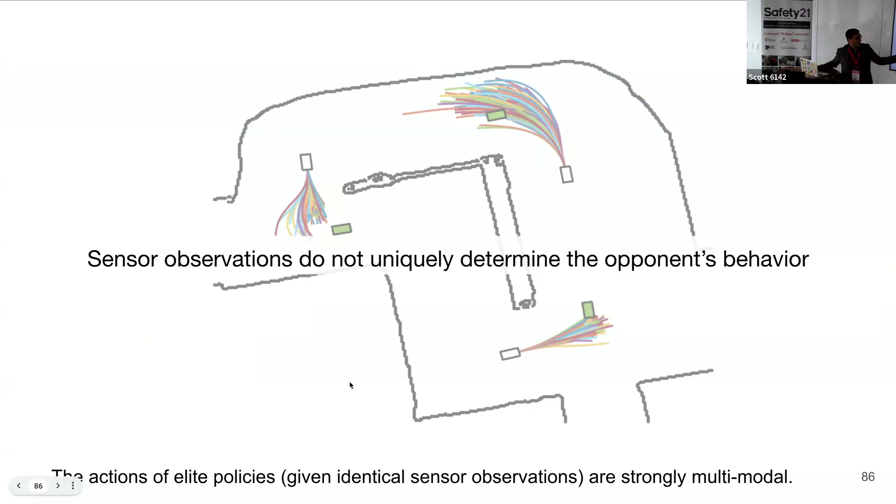Crashing is expensive and dangerous. Sensors, radars, all the off-the-shelf stuff, they only tell you the pose of the other agent, what's the short-term prediction. They don't tell you what's in the mind of the other driver. And that's what we want to know. We want to know their policy, their intention. That was part of some of our work in capturing policy estimation.

And strategies are secret. It's not like I can go back to 1955 and mine all the races. Every race is different, vehicles are different, driver's mindset is different, track conditions are different. It's a small data regime. So our theme is how to get safety through agility.

I'm not going to go through the research fully. I'm just going to give you like 6 more slides and we'll finish up.

So the first theme was how do we generate the most competitive agents that balance safety and assertiveness. We had this in ICML, and we call it Formula Zero, because Formula One has the other set of rules. Formula Zero means I don't know anything about my opponent. But through offline training, I can generate a population of, say, 20 or 100 competent policies which are very diverse. Then online, with a multi-arm bandit approach, we can figure out what kind of mix of these offline policies the opponent is. We can then predict how well they operate, what they're going to do next, what is their policy, and then outcompete them through that.

And all the theory we do is running on the vehicles, not on an external computer, and we can show we can do this online with just about 400 to 600 observations running at 10 Hertz. So very efficient.

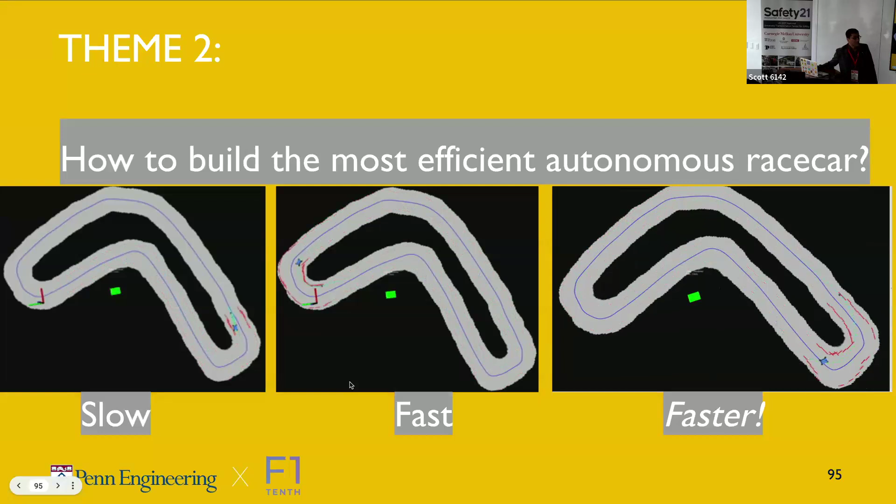The other themes are on how you design the most efficient racers and automatically tune across multiple domains, so super optimization across mechanical, control, and decision making. This was some work in ICRA called TUNERCAR, where we could automatically take any vehicle on a track and figure out how to race.

Normally, a racer would follow this dotted line, braking, braking, braking, and then speed up. But here our vehicle would push through the limits and come in really hot, drifting across. You can see the z-axis as the wheel slip, and then it gets out really aggressively. Everything we do in code and simulation then works on the real vehicle.

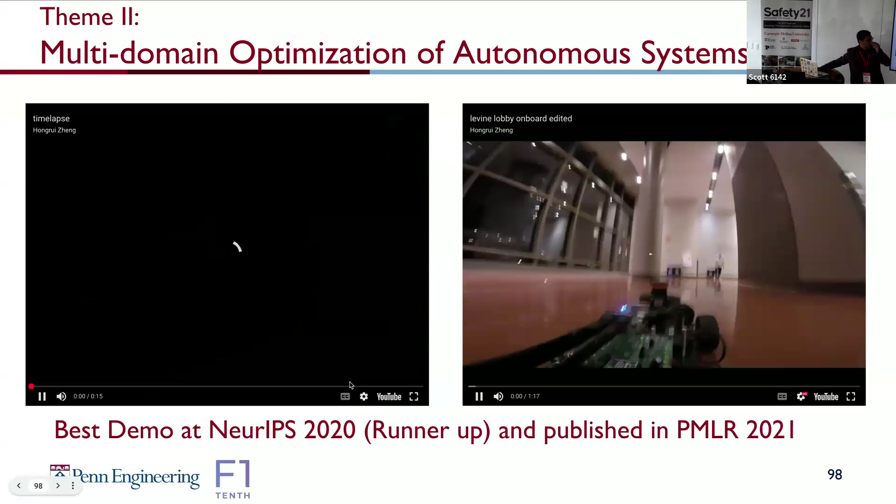And then just to wrap up, there are also projects on learning-based perception, where we use invertible neural networks because localization is an inverse problem. With normalizing flows, we can do implicit map representation and then do localization at very high fidelity and very high frequencies, consuming just a little bit of the CPU.

This is showing how we can—these are not real images, these are all generated images from this invertible neural network.

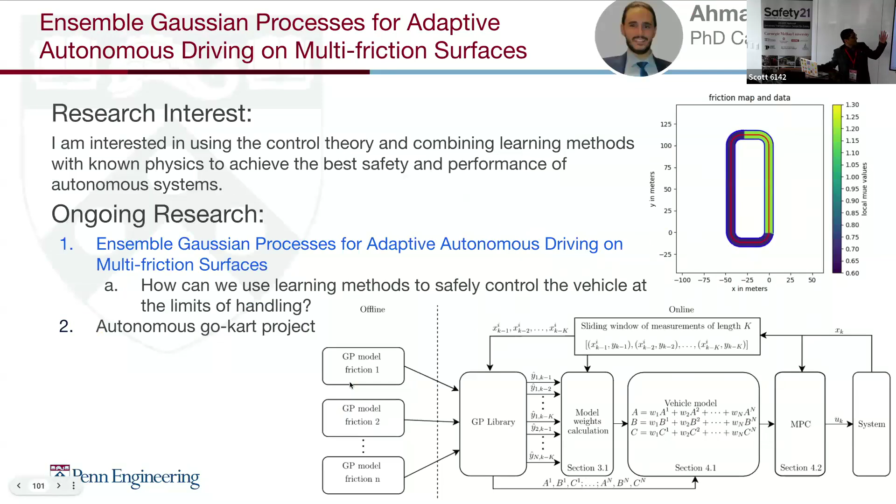And then also multi-friction, multi-terrain driving, and being able to use, say, Gaussian processes for adapting MPC or MPPI and so on.

So I was just giving you a couple of snapshots of what we do, but our main goal with AutoWare is to make this a very active community that can take all this real research we do and put it into these platforms. We take out all the issues that academics don't want to deal with—academics don't want to deal with implementation, we just want to see our research get into action. And that's what we are enabling over here.

So I'll stop here. Thank you. Questions?

When is the first autonomous F1 vehicle going to be allowed? We've been working on this for the last 4 years. No guarantee, but my plan is to set up at the 2030 Riyadh Expo. This year we have Expo in Osaka, and 5 years later we actually deliver a new concept in Riyadh. And Riyadh recently also invited the real F1 for entertainment.

So the government is now very much interested in making F1 by AI—both using humans and AI. That's an open question, but both are interesting, like robot racing. And yes, I'm personally a big fan of Formula One, so I want to beat Verstappen with AI. But yes, a timeline of 5 years is quite feasible and doable from both a technology and social acceptance point of view.